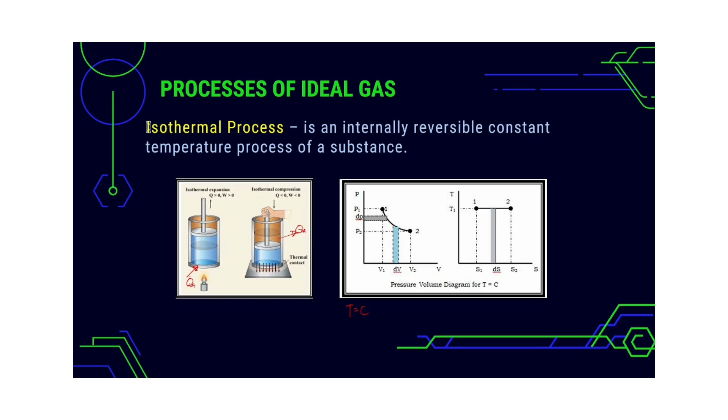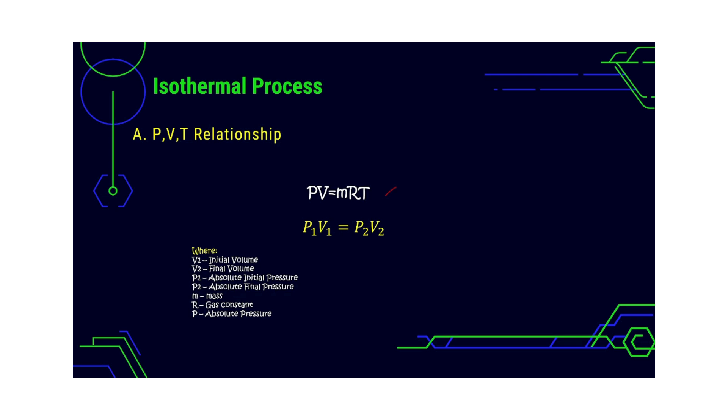If we're going to look at the pressure, volume, temperature relationship, we have the formula PV = mRT and the formula for Boyle's law, which is P1V1 = P2V2. Make sure na yung pressure and volume natin should be in the absolute. For work non-flow, that is the area under the PV diagram, and we compute work non-flow as the integral of P dV from point 1 to point 2.

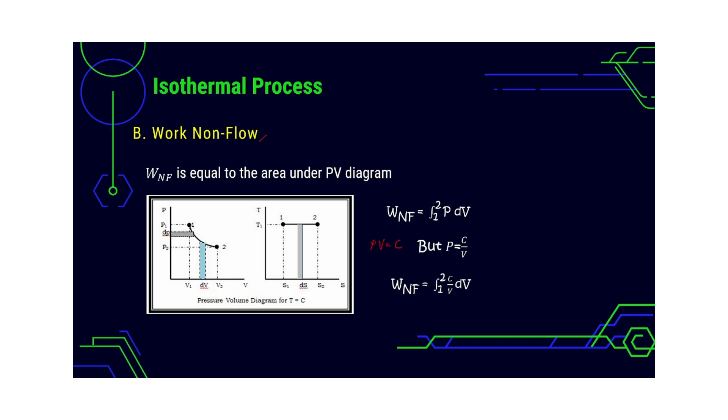And since we have PV = C, pressure times volume is constant, and we arrange this equation, we have P = C/V, and then we substitute the value of P sa integral natin. So, yung work non-flow natin will be equal to the integral of C/V dV from point 1 to point 2. Okay? So, since we substitute the value of P here, which is C/V, since C is constant,

nilalabas natin si constant. So, mag-arrive tayo sa formula na integral of dV/V from point 1 to point 2. And using this integrand form, we have ln V2 minus ln V1, or ln V from boundary 1 to 2. Multiply pa natin siya ng constant. So, work non-flow is equal to the constant times ln V2/V1.

So, then we substitute the value of C. Again, the value of C here is PV. It can be P1V1 or it can be P2V2. So, therefore, yung value ng work non-flow natin, considering the pressure and volume at state point 1, will be equal to P1V1 ln V2/V1. Or, work non-flow is equal to P2V2 ln V2/V1.

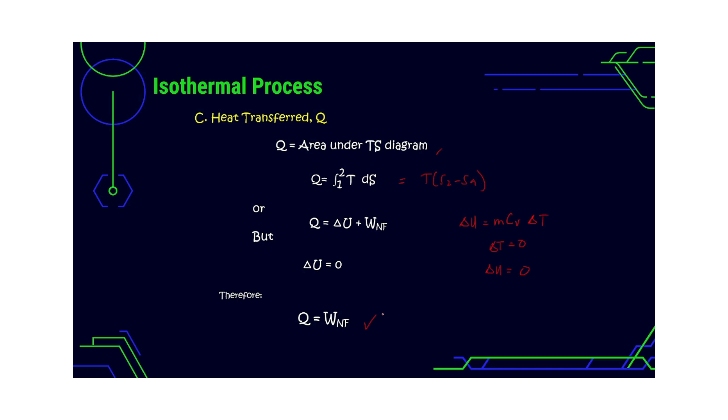And since yung delta U natin, that is mCv delta T, tama? So since delta T is 0, therefore delta U is also 0. And if delta U is equal to 0, we can conclude that ang Q natin is equal to work non-flow. Okay? Internal energy, we have 0.

Delta H is also equal to 0 since we are utilizing delta T in the formula of delta H. And we know that delta H is equal to mCp delta T. So if we substitute delta T in the formula, we get 0. Wala tayong change in enthalpy. And the change in entropy, we have the formula, again, the integral of dQ over T from boundary 1 to 2.

And since yung dQ natin, ang heat natin is equal to the work non-flow, we utilize the formula of the work non-flow, then substitute natin siya sa formula ng entropy. So therefore, ang formula ng work natin is P1V1 ln of V2 over V1. Right?

But since we have P1V1 here, take note, another formula for work pala. Balik tayo dito sa work non-flow natin. Since we are utilizing the PV formula, we can also get the work non-flow using mRT. Ang T natin walang pagbabago, right? Kasi it is constant. So you can utilize mRT1 or mRT2, or simply mRT. Multiply natin ito ng ln of V2 over V1. So we have this formula for work non-flow also.

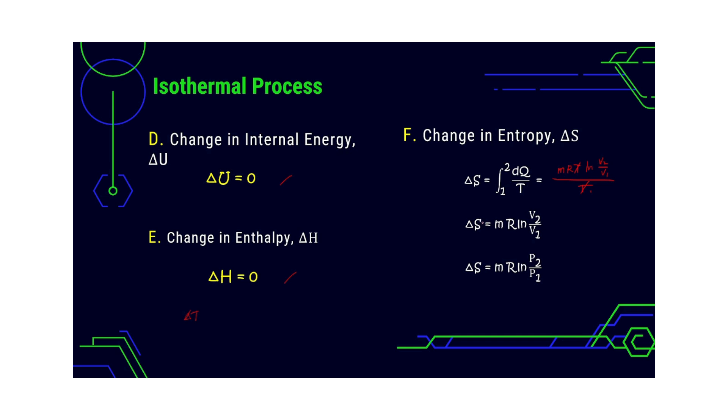So therefore, ang delta S natin can be computed by mR ln of V2 over V1, or we can use mR ln of P1 over P2. Okay? And for the work steady flow, we are using again the formula, the integral of V dP from state point 1 to state point 2. And since PV is constant, we get V from this equation: C over P.

Substitute natin siya sa V, magiging integral of C over P multiplied by the differential in pressure from point 1 to point 2. Constant, labas natin, matitira si dP over P. And we get the formula for this integral: ln of P1 over P2 multiplied by C. Ang C natin, again, is equal to PV.

So therefore, we can use the formula P1V1 ln of P1 over P2, or again we can utilize mRT, so ang work steady flow natin will be equal to mRT1 ln of P1 over P2. Or we can also use P1V1 ln of V2 over V1, or mRT1, pero utilize natin yung V2 over V1. Okay.

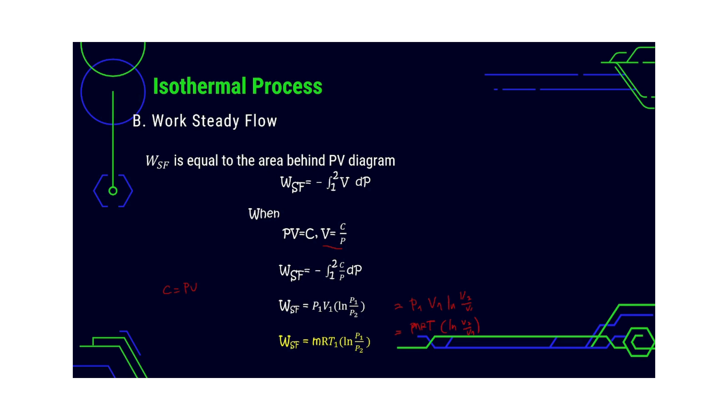So, yan lang yung mga formula natin under isothermal process. So, hindi naman gaanong kahirap. So, for example, we have 4 pounds of air, gain 0.491 BTU per degree Rankine of entropy during a non-flow isothermal process. If P1, or the pressure 1, is equal to 120 pound per inch squared absolute, and your volume 2 is equal to 42.5 cubic feet, find volume 1, temperature 1, work non-flow, and the heat. And also, we need to find the delta U.

Okay, so lagay natin yung mga given muna. Okay, the given, we have 4 pounds of air. Meron tayong working fluid natin, or yung ideal gas natin is air. Binigay si mass, 4 pounds. Nag-gain daw yung gas natin ng 0.491 BTU degree Rankine. So, there is an increase of entropy. So, meron tayong change in entropy that is equal to 0.491 BTU per pound degree Rankine. Per pound yan, degree Rankine. Kulang yung ano natin dito.

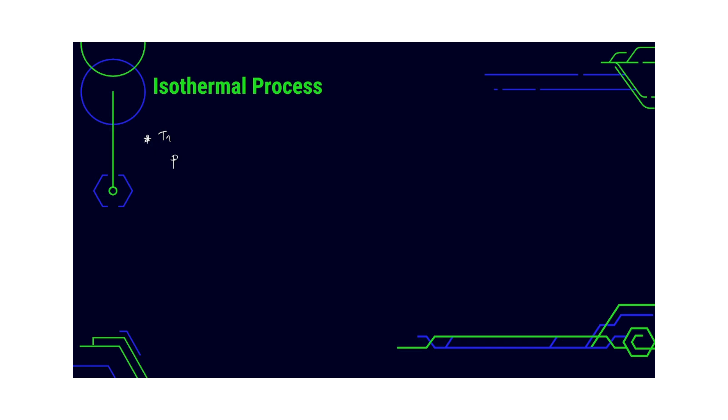So, for the value of T1, paano naman natin kukunin si T1? We can use the formula P1 V1 is equal to MR T1. So we can utilize this formula, kasi meron naman tayong P1. Ang P1 natin is 120 PSIA. So, 120 pound per inch squared, but we multiply muna this one by 144 to cancel out the inch squared. Turn that to feet squared kasi ang kailangan natin is naka foot pound force na energy.

And then we have also volume. Volume 1 is 7.093 cubic foot. That is equal to the mass. Ang mass natin dito is 4 pound.

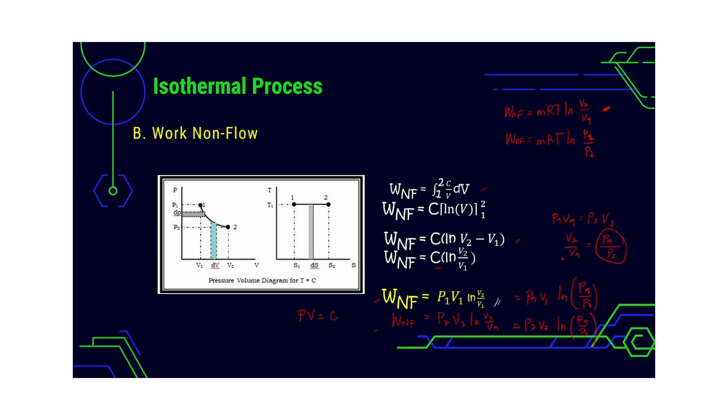Or you can utilize P2. Kunin nyo muna yung P2. So, meron naman kayong volume 2. Then utilize the formula na P2 V2. Or you can also use the formula MRT ln of V2 all over V1. So, kahit ano. So, dito na lang tayo.

P1 natin is 120 pound per inch squared times 144 inch squared to feet squared, multiply by volume 1, that is 7.093 cubic foot, multiply by ln V2. Ang V2 natin is 42.5 all over 7.093.

So therefore, yung W nating makukuha or work non-flow, that will be equal to, multiply na lang natin para maliit na value lang, so all over 778, 1 BTU. Para naka-BTU yung makuha nating value. So, in BTU, we have 282.06 BTU. Okay? So, yan yung work non-flow natin.

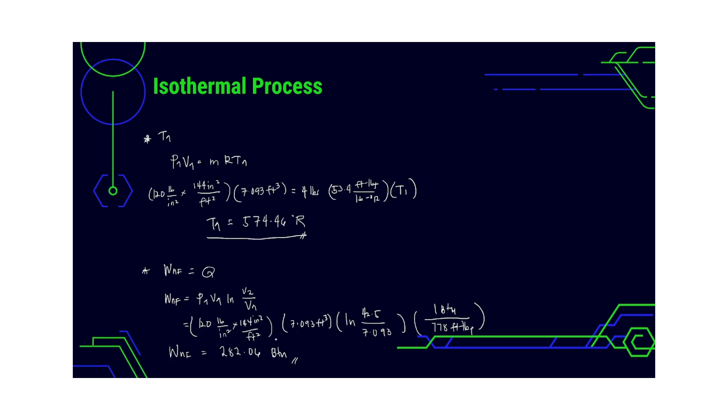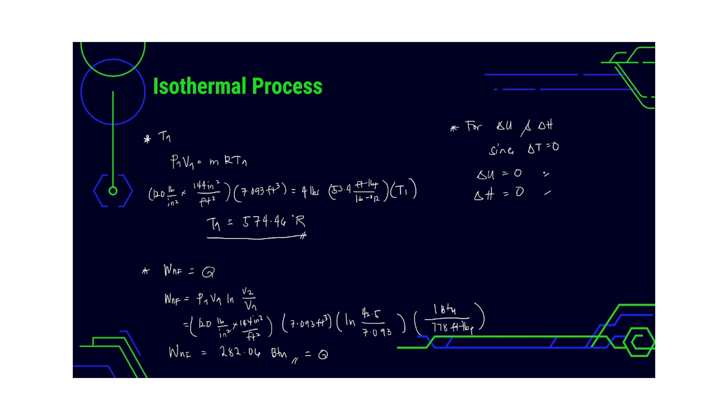So, therefore, computed na din si Q. Q is equal to work non-flow. And for the delta H, delta U, since delta T is equal to 0, therefore, delta U is also 0. Delta H is also 0. Okay? So, ganun lang mag-solve under isothermal process. So, for example number 2.

Okay, so for the second example problem, air flows steadily through an engine at constant temperature of 400 Kelvin. So, sulat na natin yung mga given. Wait lang. So, yung given natin, we have the ideal gas air. Constant temperature. Temperature natin is equal to 400 Kelvin. So, pinapahanap si work per kilogram. Okay, mass specific energy.

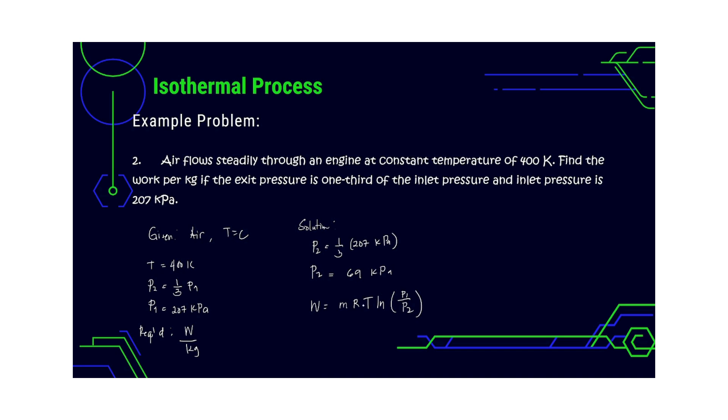So, ang W natin or work, that is equal to MRT ln of P1 all over P2, right? So, meron tayong formula nito under work. Diba? Or this is also equal to P1 V1. But since we have no volume and only pressure is given, we utilize the formula wherein existing si pressure 1 and pressure 2. Unless we use PV equals MRT, we compute for volume 1 and volume 2, but then medyo matagal. So, gamitin na lang natin to.

Okay, so naka-per mass tayo. Yung work per kilogram, that is work all over mass, that is equal to R of air times T ln of P1 over P2. R of air, let me check first. Sorry for the ingay, nasa faculty room lang ako. Okay, 0.287 kilojoule per kilogram Kelvin. So, substitute na natin siya.

So, work per mass, that is equal to 0.287 kilojoule per kilogram Kelvin multiply by temperature. Ang temperature natin, di naman nagbago, 400 Kelvin. Multiply by the natural logarithm of P1, 207, all over 69. Ang work per mass natin, let me check first. Okay, 126.12 kilojoule per kilogram. So, madali lang yung isothermal process. Pag-aralan to, kasi isasama ko po ito sa examination.